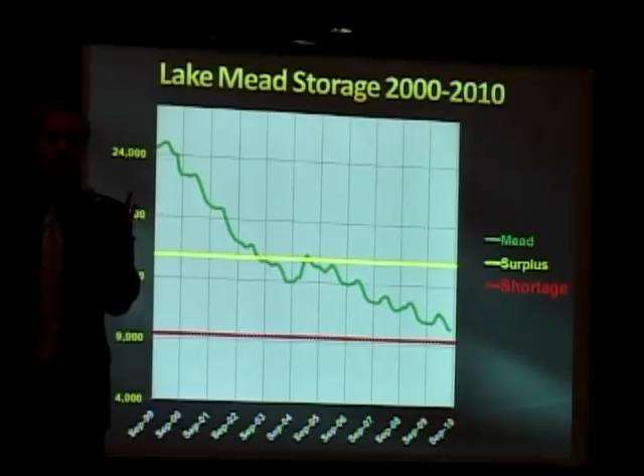Now, granted, storage in Lake Mead and Lake Powell is about 50 million acre feet. I mean, they were designed to withstand long periods of drought, but this is rather concerning.

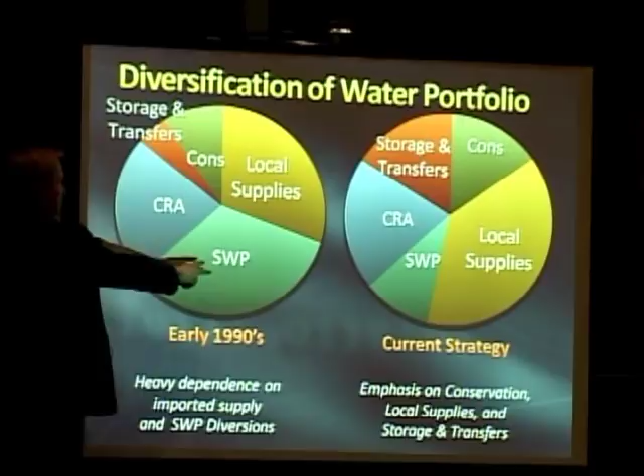So what do we do? In Southern California, the tap water engineers were figuring out, well, we have to diversify the supply. And so in the early 1990s, where we relied a lot on the State Water Project, the current strategy is to rely a lot less on the State Water Project, a lot less. And we have to make that up with something else.

Because remember, with this million acre feet from the state project, million acre feet from the Colorado River, million acre feet from local groundwater, where are you going to make up that water? Do you conserve more? Do you develop more local water supplies? Is that how we're going to do it? And the answer is yes.

Are we going to try and do more ag to urban transfers? The answer is yes, if we can. That's what we're trying to do. What is interesting about this pie chart is this is still somewhat of a concern for us in terms of making sure we can maintain the Colorado River aqueduct at the levels we hope we can.

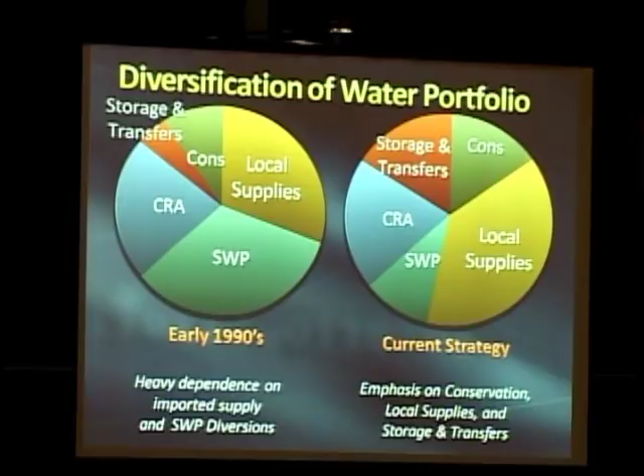So our emphasis today is to emphasize conservation, local supplies, and what I call ag to urban transfers. Okay, let's talk about local supplies.

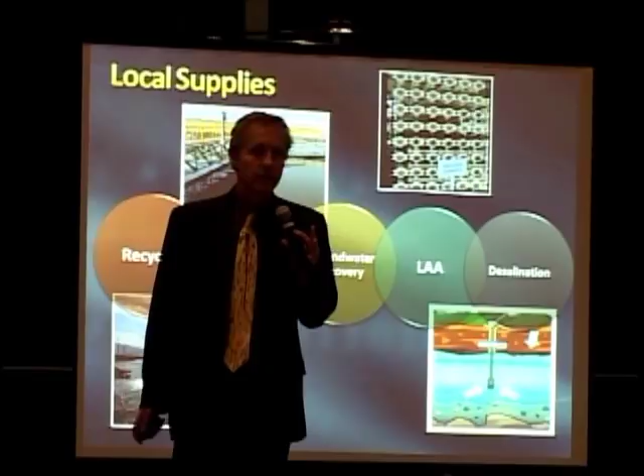Water recycling seems like the right thing to do. I'll tell you right now, the wastewater treatment plants we have here in Southern California are tertiary treated plants. They go through multi-barrier treatment processes. Title 22 water that comes out the other end is very, very high quality water. We're not talking Jurassic Park technology from World War II. These are tertiary treatment plants.

And that water has designated use for golf courses, landscape, even groundwater recharge, and it's in our future. LA pioneered a lot of that and continues to do so, along with many other member agencies in Southern California, to make sure we can use the recycled water. If I spend all that money to get it down here, I should be able to reuse it again.

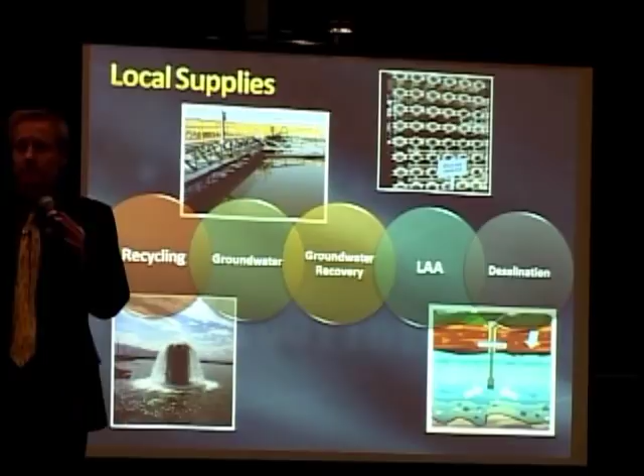Okay, groundwater. Believe it or not, there are groundwater basins, particularly in Ventura County, that are full. In fact, they're flowing so full that streets are still getting flooded because the groundwater is not being utilized enough. The reason is, years ago, many cities said, well, we have imported water now, we don't need groundwater. It's kind of crummy groundwater, it's a little salty, we're not crazy about it. And so they abandoned their wells.

And of course now, when people are talking about developing local groundwater, they want to get those wells drilled again. Except now, with the budget we have in our cities, it's hard to get money to do that. And you can always blend groundwater, right?

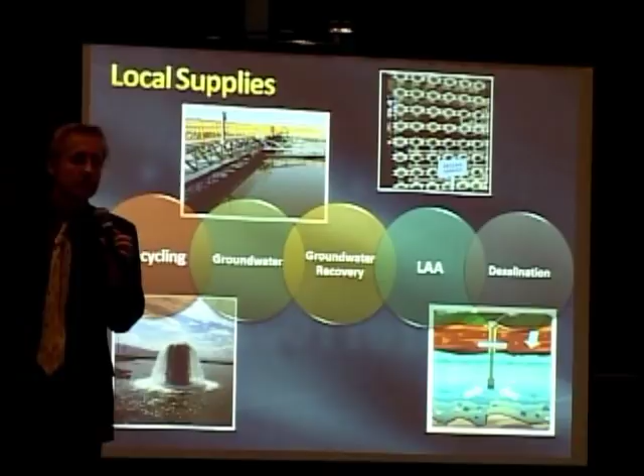Groundwater recovery is basically trying to take groundwater that maybe is not potable and make it potable. And you know what? It's not the contaminants that are the big deal, not necessarily the perchlorate issues or the chromium-6 issues. By and large, the issue with groundwater recovery is taking the salt out of that groundwater to make it potable, building desalting facilities to treat groundwater.

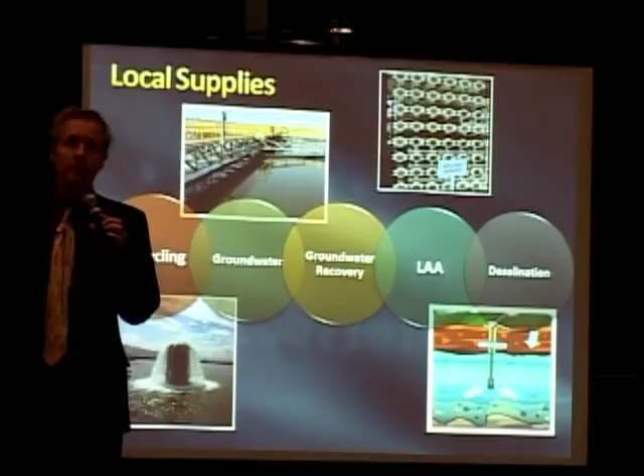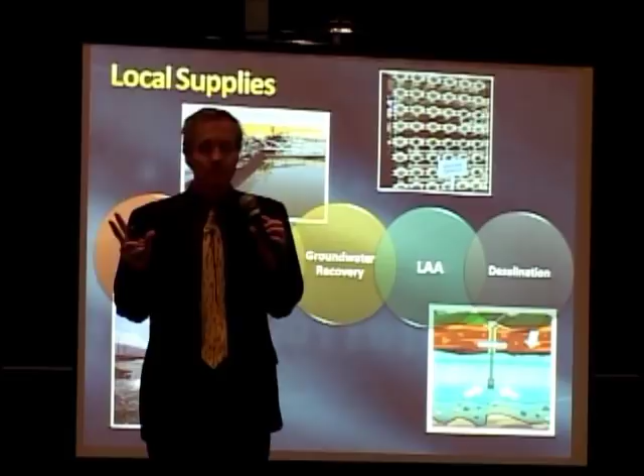It's a lot cheaper to treat salty groundwater than it is to treat ocean water. Groundwater salinity is about 2,000 to 3,000 parts per million salt. Ocean water is about 30,000 parts per million salt. And of course, you can do the math in terms of what that would be like.

You're looking at order of magnitude differences in salt. If we can take a lot of the salt out of our groundwater, you're going to solve a myriad of problems. And it's not necessarily the sexy thing to talk about if you're in the water treatment business. Well, I want to get rid of that contaminant, I'm going to take care of this TCE problem. It's really about the salt, by and large.

The LA aqueduct, I think they're trying whatever they can to hold on to the supplies they had. I don't know, Fred, that's as best as I can say for that situation right now, and trying to develop some things up there with their system.

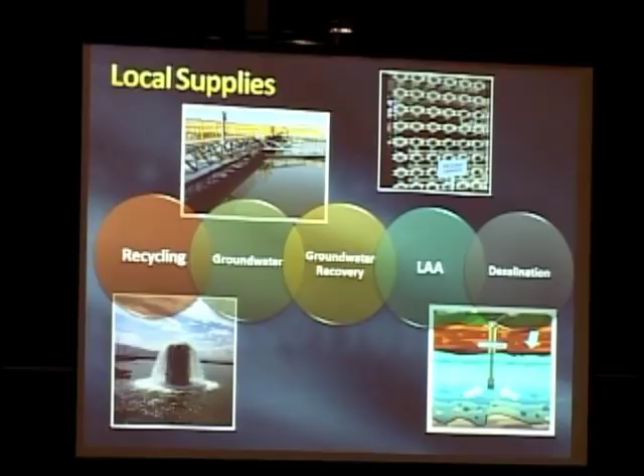And of course, desalination. Now, the desalination slide here is not the groundwater treatment one, it's ocean water desalination. You've heard a lot about ocean desal, and I'm sure you hear it all the time. Well, Christ, we live right there by the big water supply, why don't we just run to the ocean and take all that water? I'm going to explain that to you here in a second.

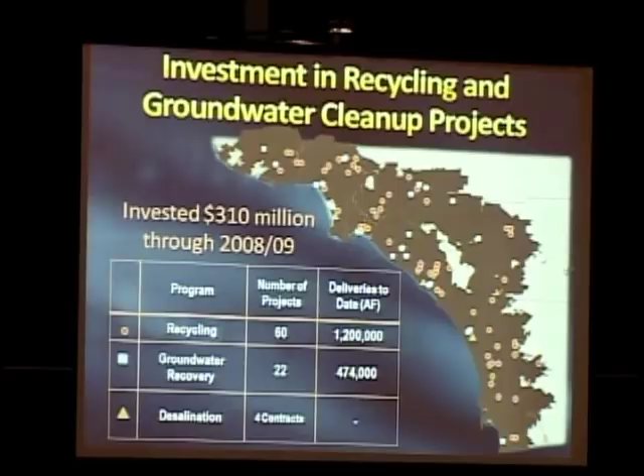In any event, Metropolitan, that's you and I, made up that service area, part of what's on our water rates, have invested throughout the entire region to try to essentially develop more local projects, more water recycling projects, more groundwater recovery projects, anything we can do to get ourselves off of the state project system for the frequency of time we need to be on it because of the issues that are out there. And they've made a lot of progress, and of course, we need to do a lot more.

And at least as of this slide, which is less than a month old, they've already invested about $300 million to do so. So the strategy is, what I tell my students, and what you'll tell your children, is we have to meet our future demands through local resources. Right now, that's really where the strategy has to be. And that's exactly what Metropolitan has been trying to do, what the direction their board has taken - to invest more in conservation,

recycling, and groundwater. I'm downplaying the ocean desal here for a second, but if you can do 1 billion gallons a day, that's 1.1 million acre feet a year - you just serve the demands of those 3 large cities right there. So that's kind of a big deal.

Okay, watershed management. This is going to tie into my ocean desal discussion here in a second. Why do we manage watersheds at all in Southern California? We had never done that before for many years. The reason is because all these areas have to comply with federal and state regulations. We call that total maximum daily load compliance, and try to develop an effort that if we're going to have to comply with what you can discharge into a creek system - and that applies for everybody that lives in the watershed - then let's try and do it in a way that can actually develop a supply and save everybody money.

And so I just happened to pick the Calleguas Creek watershed, so I spent most of my time working on there, just to show you the different creeks that feed into that watershed - basically import water dependent - that ultimately feed out to the ocean, got the involvement of many, many cities to do just that.

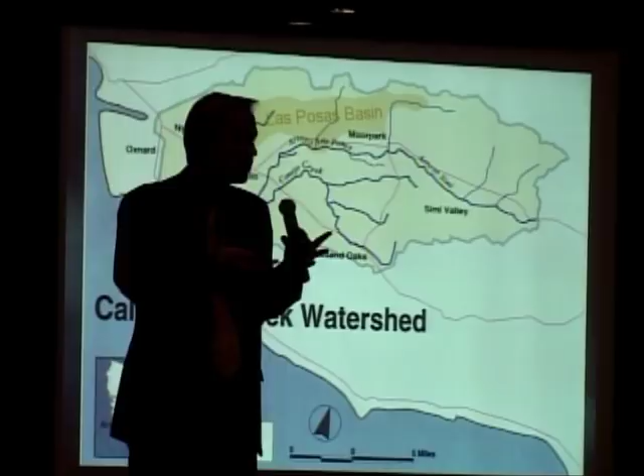And as of today, we're in the process of building a salinity management pipeline, which is a fancy word for brine line, because once you take the salt out of the water, you got to take it somewhere - you got to put it in the ocean, right? And also build groundwater treatment facilities locally. So there's discussions between Camarillo, Moorpark, Simi Valley, Thousand Oaks to start doing joint projects like that. And I'm sure those same discussions are happening here in LA County with many cities we have here.

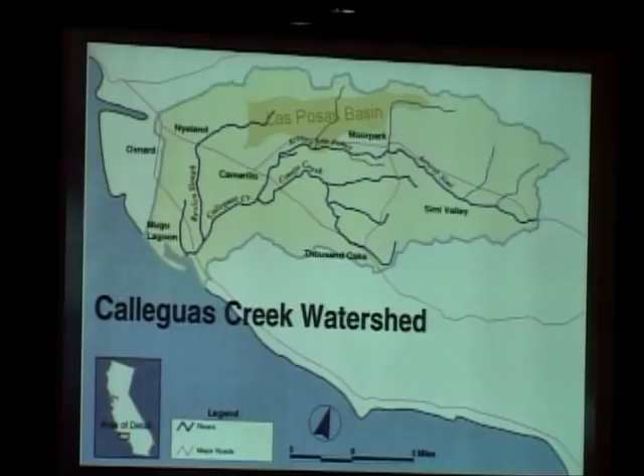So watershed management is going to be around for a while, and it should be. It really is the direction we need to be going. So let me talk to you about costs, because I thought I would start with the cost issue.

between $2,000 and $3,000 an acre foot. Many people will say, well, how can that be? Because I hear you can do it for much, much less. When I wholesale treated water to our cities, we were wholesaling that water under pressure, high quality water for about $800 an acre foot. That's your tap water. Tap water goes through thousands of tests a year to make sure that it's safe to drink.

So you have to compare that with what people are talking about going to the ocean, and basically it's going to cost us a lot more. Very energy intensive, very expensive, and typically somebody needs to subsidize those costs.

So is the ocean our immediate answer? My answer to you is no, it is not. And there are a couple of reasons for that. Number one, if I go to the ocean, most of the demand is still uphill. So not only do I have to treat the water by the ocean, I typically have to pump that water uphill to get it back to my service areas. And you still have environmental issues you have to deal with. The environmental issues are not going away, and it's something we want to be cognizant of.